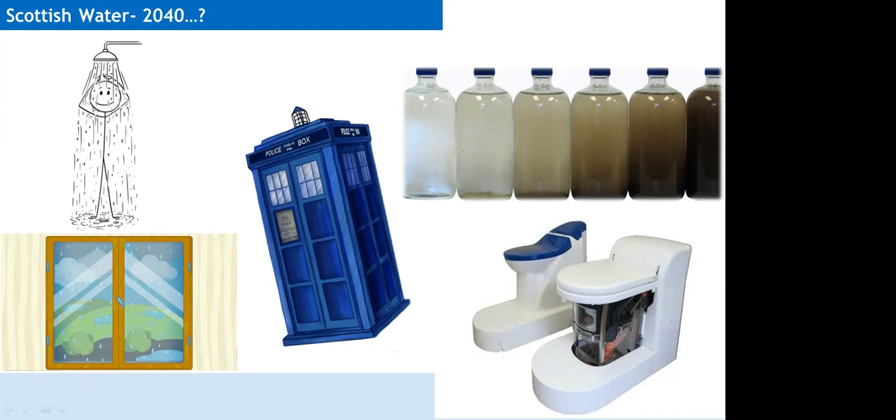So keep that picture of a potential future in your heads as we go through this presentation, and let's think about the role of innovation, how we might want to innovate to get where we're going. Now, if you paid attention to the introduction at the start, you'll see I actually work in a strategy team rather than an innovation one, and an approach we often use in strategy is a simple 3-step model.

Everybody loves a 3-step model on the screen: Where are we now? Where do we want to be? And how are we going to get there? So let's start off with where we are now. And actually, we're going to go back in time and begin with a little history lesson.

Most of our large wastewater treatment works today are operated using something called the activated sludge process, developed back in 1914 by Ardern and Lockett. It could arguably be considered the biggest improvement in public health in the 1900s, and it certainly also showed dramatic improvements in our waterways.

If you're not familiar with an activated sludge process, typically what that would look like in layout form is what's on the right of the screen there. The wastewater is initially held in something called a primary tank for a few hours, where most of the particulate matter settles to the bottom, and the water comes out the top and passes into aeration basins.

There it's mixed with a biomass or an activated sludge, bacteria that degrade the remaining organic matter. The mixture is then settled again in a final tank, which separates the wastewater from the biomass. The clean water passes out into the environment, and the sludge is collected and taken away for further treatment. And over 100 years on, we're actually still largely using the same process.

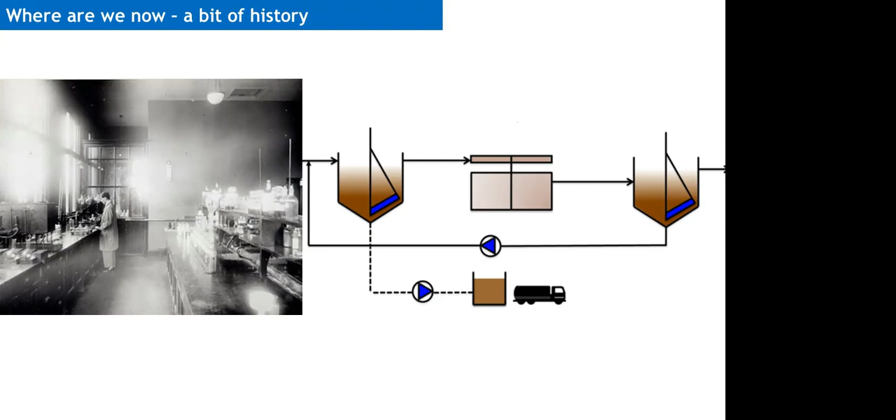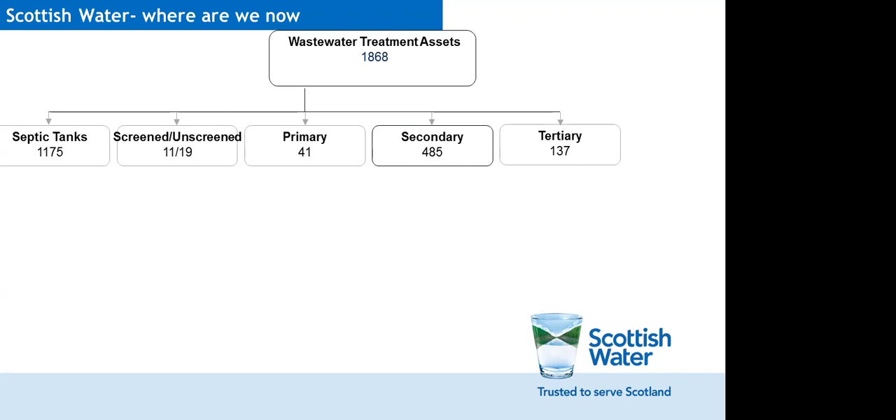So if we break down our asset base for wastewater at Scottish Water, we have a little over 1,800 wastewater treatment assets, split across all kinds of populations. At the small end, we have the septic tank, and in number that's actually the greatest number. Then we move up through primary, secondary, and tertiary treatments.

If we look at the breakdown again, we've got a large number of trickling filters, and about 10% of our overall treatment asset base is activated sludge. So if that's only 10%, why am I making a big deal out of it? Well, activated sludge makes up the largest part of our population-based treatment.

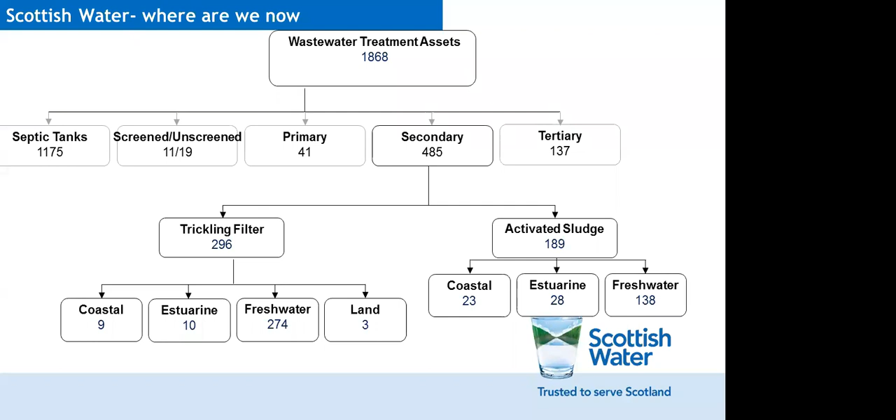So if I move on to the next slide, this is a breakdown of every single treatment works in Scotland, all 1,868 of them by population size. Right up at the biggest was Shieldhall in the top left corner, and actually all of these ones you can see, a large number of those across the top, these are all activated sludge treatment works. It's not until you get right into the tiny squares in the bottom right corner that we're looking at trickling filters and septic tanks.

So by population, the activated sludge process makes up the largest part of our wastewater treatment systems. And one of the things we need to think about is whether it's time to revise that view.

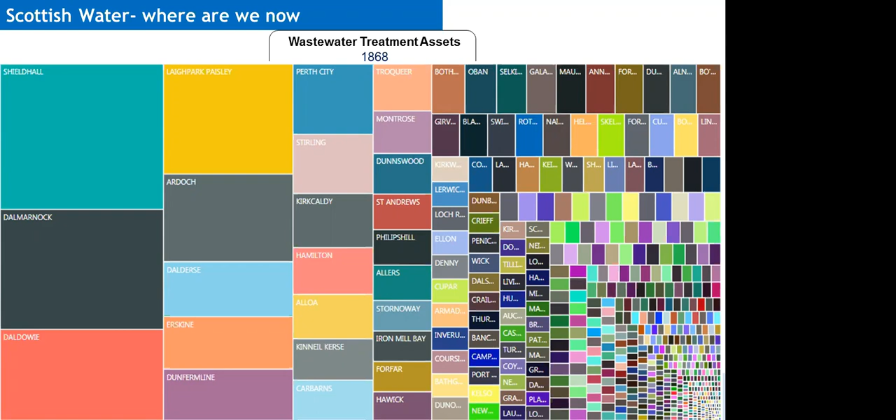Now, for anyone who's based in Glasgow, and we were originally supposed to have this talk in Glasgow, let's bring this a little bit closer to home. One of the largest treatment works in Glasgow, in Dalmarnock, was constructed in 1894 originally, for all the fact fans out there. But this sewage works was upgraded in 1965, that's 55 years ago.

This slide's got some extracts on it from a fascinating paper I found, if you find this kind of stuff fascinating like I do. This was presented to the Institution of Municipal Engineers, which was an early precursor of the Institution of Civil Engineers today. This showed all the engineering requirements that were needed to convert Dalmarnock into this modern activated sludge works.

While this site has been further modernised since 1965, indeed it's seen the introduction of ammonia and phosphorus removal processes to meet tighter quality standards, the site itself still largely runs on this activated sludge process. And if you walk around the site, the layout really hasn't changed very much from this proposed layout drawing over 55 years ago. And there's a good reason for that.

The activated sludge process is effective, it's reliable at removing the majority of organic pollutants in the wastewater. So why innovate? What might we want to change? Well, while the activated sludge process is very effective at removing pollutants, it does have its faults.

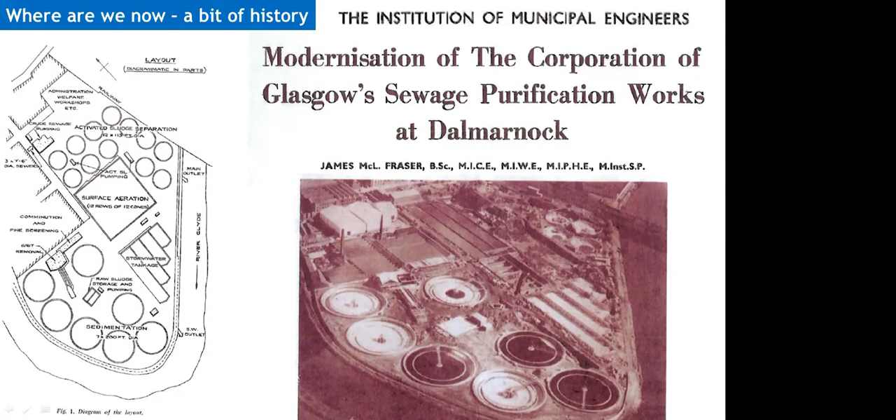So thinking forward to where we might want to be in the future. In Scotland, Scottish Water, we've recently published our strategic framework, and that sets out these 3 key ambitions for the future: delivering service excellence, moving beyond net zero emissions, and providing great value and financial sustainability. Now, each of these ambitions will overlap with each other, but there's also tensions between them within delivery. And without innovation, we won't be able to achieve them all.

And underpinning these ambitions, there's a whole set of strategic objectives that will help us achieve the 3 ambitions. Now, I'm going to zoom in on just 3 of those that will be critical to transforming our wastewater service into SR21 and beyond. So firstly, enhancing the natural environment. We know that standard wastewater treatment has delivered huge improvement in our waterways over the last 100 years.

But if we also want to look at improving our performance for things like those priority chemicals, and also look to improve the land and air environment as well, we'll need to think different. Similarly, we know the wastewater treatment process is currently a consumer of resource. It requires the use of electricity and chemical. And yet there is also resource contained within wastewater. So how might we go about harnessing this instead to fully embrace the circular economy?

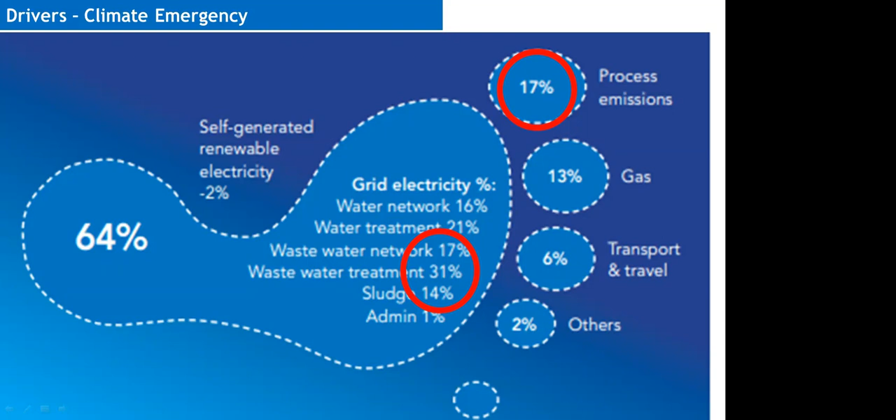Thinking a little more in the current frame of what we might need to do and what our drivers are for innovation is that of population growth. Across Scotland, our population is due to increase by about 5% in the next 25 years.

That's not a massive amount of population growth, but the countrywide figure masks some huge shifts in terms of regional shift of population within the country. We're seeing huge numbers moving from the west of the country towards the east. Within Edinburgh, the Lothians and Aberdeenshire, we might expect to see growth in the region of 20% in the next 25 years.

We need to be sure that these growing communities receive effective sewerage services, but we also need to be able to do this without placing huge investment demand on our existing customers to build new assets. Achieving this will be a challenge.

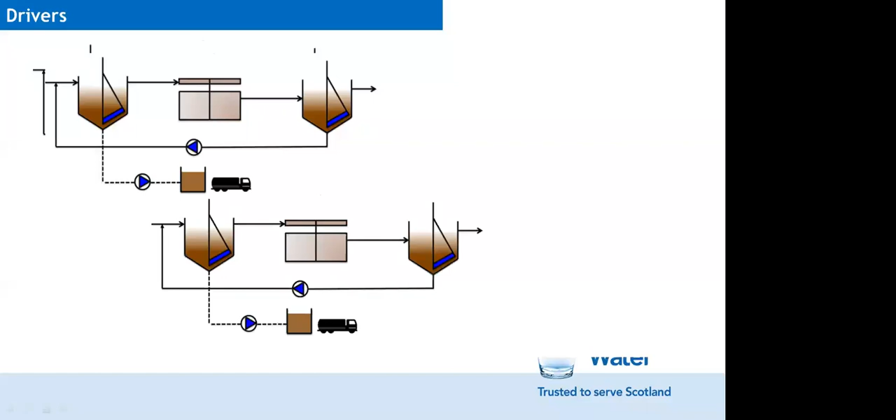Historically, when we were looking to address growth, if we'd had something like the activated sludge process, what we would do to address growth in a community might be just to create a parallel works, or even another one, doubling or tripling capacity. We know that this does work, but it's also costly, both from an operational and a capital perspective, and land isn't always available.

So some of our more immediate innovation projects have been looking at process intensification - how we can do more with the assets that we've currently got. This will help us address growing populations with reduced need for investment and reduced carbon emission in construction.

There are a number of options out there for intensifying the wastewater treatment process that all look at different aspects of innovation, and these are just a few on the board that we've looked at in Scottish Water. I'll take a couple of moments to look at a few of the trials we've done in a little more detail.

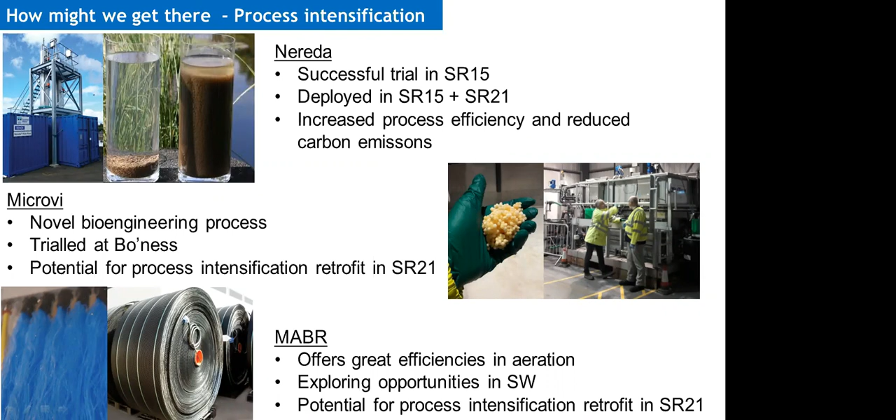First, let's look at the Nereda process. This is quite an exciting one because it's one we've seen all the way from development stage up to a full-scale installation. This is based on a traditional biomass type process. However, in this instance, through some clever bioengineering, all that bacteria is pulled together into a granule. What that means is you've got a much higher concentration of biomass treating your wastewater, so you can treat more wastewater with a smaller asset to a higher standard.

Now, because the process operates in a similar manner to something called a sequencing batch reactor, there's huge potential out there to retrofit this technology into wastewater treatment works that currently use that SBR type method. That allows a significant increase in population that can be served without the need to construct any new assets. Scottish Water first came across this technology and it was introduced to us maybe 7 or so years ago.

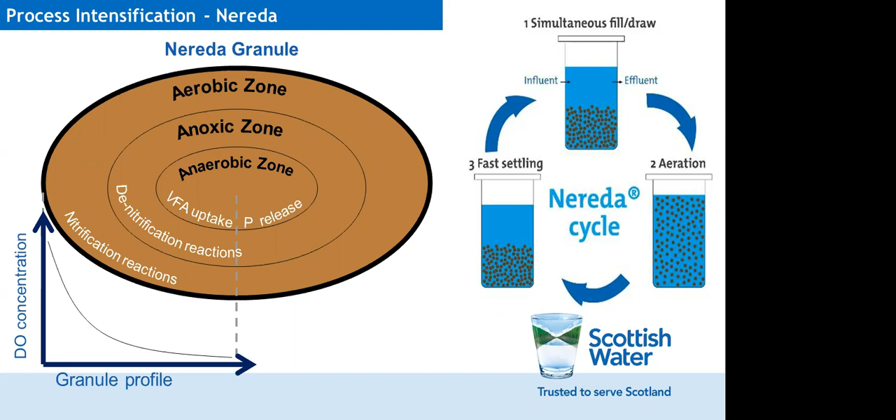And off the back of that, and some promising work that came out of the Netherlands, we ran a couple of pilot reactors, one of which was sited at Dalmarnock, the treatment works I mentioned earlier. That's a picture of the pilot we ran on an unusually sunny day over in Glasgow.

What you can see was really a very successful trial. For the most part, the total phosphorus, TP, was well below an average of 1 milligram per litre, which was what we were looking for. Ammonia results, again, pretty much every result came in below 1 milligram per litre, which was really fantastic. Similarly, the BOD, the organic content of the wastewater, was well within our performance expectations, as was suspended solids.

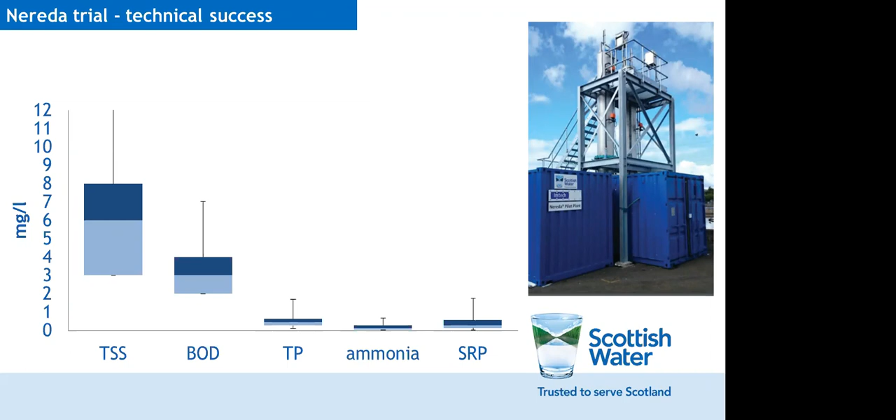Off the back of what was quite a successful trial, we put forward a full-scale project. Next slide, yep, a photograph of our Nereda installation at Inverurie. This is a small satellite town in Aberdeenshire that was both due to be upgraded with a significant capital maintenance project and also experiencing quite a bit of growth in the catchment. So here we are in the final stages of construction for that site, and we're now at the end of commissioning. Quite exciting to see a process go from very early stages through innovation trials through to a full-scale installation.

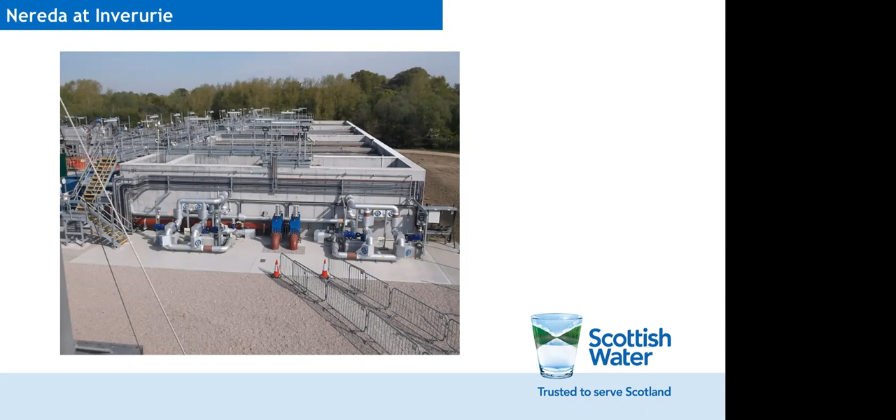Now, the other pilot trial I wanted to briefly mention, at a slightly earlier stage in development, is the Microvi technology. This is another really exciting, really innovative piece of technology we've been trialing down at our site in Bo'ness.

To try and summarize how it works, you've got the little granules or biocatalyst, which is what the hand's holding in the left photo. I always think it looks like Rice Krispies, but it's actually little kind of beads, and they've got specific selected bacteria growing inside of them. It's really cool because you can select the bacteria that best degrades the wastewater, that are most effective at treating what you're after treating.

Which is not what you typically get in activated sludge. You typically get the fastest growing bacteria that outcompetes everything else. With this, because the bacteria are embedded within the catalyst, you can select the most effective treatment, even if they're not the fastest growing biomass. The picture on the right is the pilot unit we had down at Bo'ness.

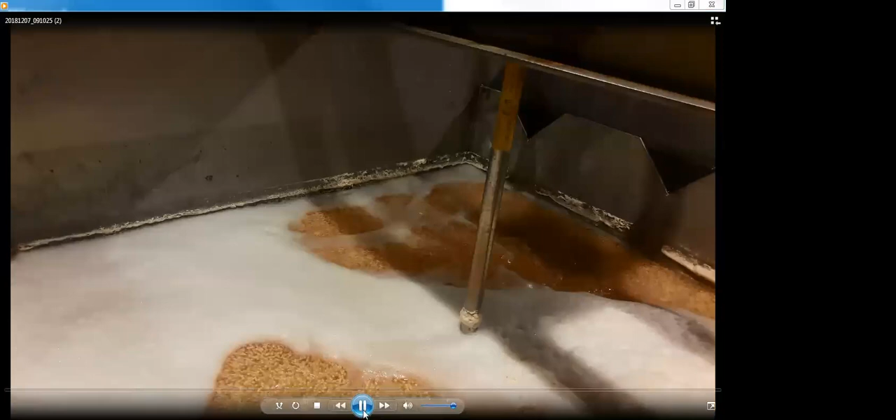I'm going to see if I can show a little video of that in operation. That's what it looked like when it was up and running.

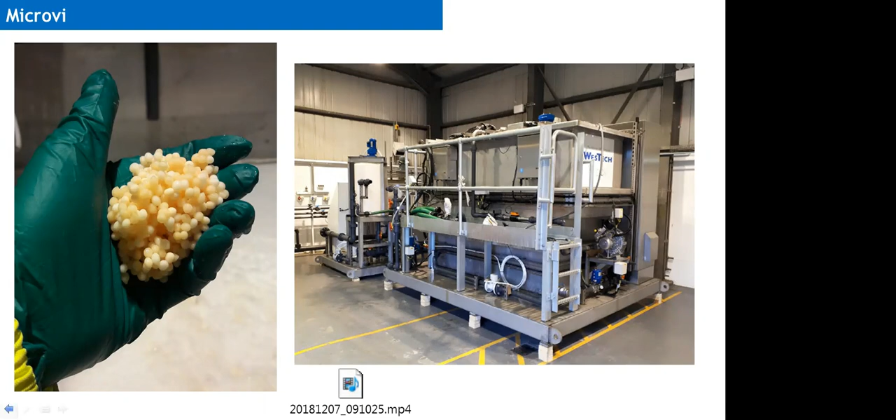We then had a short period of what I've called normal operation, so just taking a standard influent in, running it through the treatment process and sampling the effluent, particularly the ammonia and the soluble BOD, soluble organics in the wastewater. You can see that the effluent performance was really pretty good.

Happy with that, we moved into phase 3, which I call testing the limits. That's kind of pushing the technology as hard as we can. So how can we, if we increase the throughput or decrease the aeration, what if we mimic storm events, all that kind of stuff, so how well does the technology cope if you're putting it outside its typical bound of operation. Really quite happy with how that's performed, so hoping that will move through to the next phase trials and investigate options for full-scale treatment.

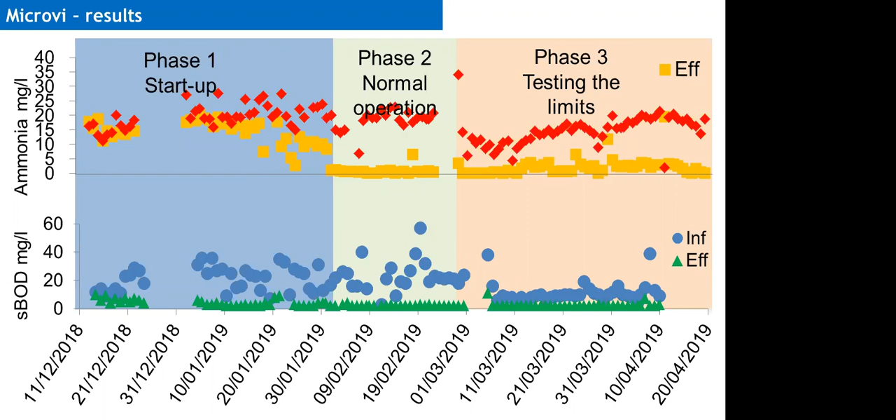The other aspect of Microvi that's been really, really interesting is looking at suspended solid production. One of the big claims of the technology is that they don't produce a biomass or any excess biomass because all the bacteria are embedded within the catalyst. We wouldn't have any secondary surplus sludge that we'd need to collect and then take off site and treat. You can see the results there in terms of the suspended solids.

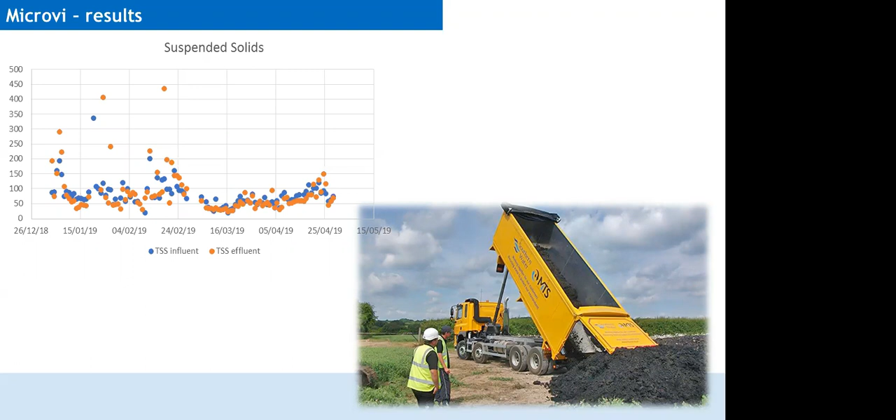Actually, for the large part, what was coming in equals what was coming out, so we weren't generating any excess biomass. It also meant that maybe we weren't degrading any of the suspended solids coming in either, so there's pros and cons to that result. But on the whole, we could pretty much confirm that we weren't generating any excess biomass.

Now, I couldn't talk about our Microvi trial at Bo'ness without doing a little plug for the Innovation Test Centre down there. The Bo'ness Test Centre is a live wastewater treatment centre with a dedicated test centre attached.

And these facilities, and there's a complementary one out there for clean water up in Gorthleck as well, are run as part of our commercial arm, and therefore they're available to anyone who wants to test the technology there. So it doesn't have to be Scottish Water trialling the technology, although we certainly do trial a number of things down there.

So if that's some of our more immediate innovation, how are we thinking more about the long term? Going back to our strategic framework and what we might need to do to achieve our three strategic ambitions, our innovation team have been developing a series of route maps and challenges for innovating, which are designed to align with our strategic framework and help set the direction for innovation.

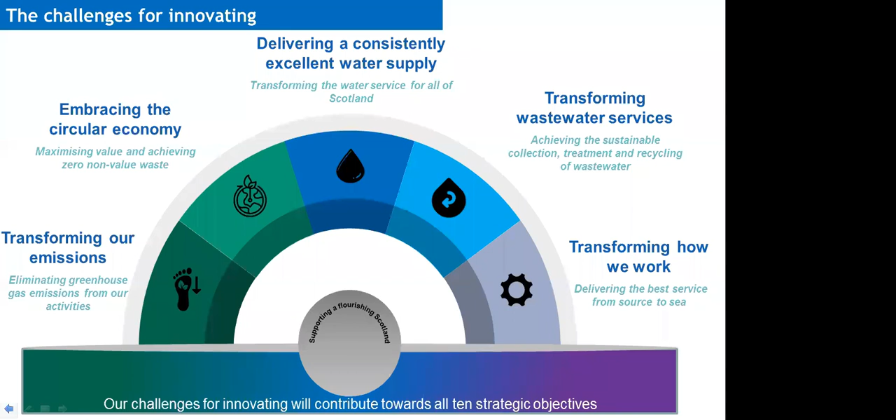So by going out there and setting our challenges for innovating, we're hoping that the industry and the supply chain will help us take up this challenge and come up with new ideas. From the back of that, we're hoping to develop four demonstrator projects, and the idea of these is to prove at-scale versions of these step change innovations that we're after.

Now, the projects shown here cover all aspects of our strategic ambitions, but the one I particularly want to focus on in the final part of this presentation is talking about energy and resource factories. So if we're to move into this world where we've transformed our emissions and enhanced our natural environment and fully embraced the circular economy, then we're going to need to rethink our attitude to wastewater, moving away from thinking about wastewater treatment works and towards thinking about sewage as a potential source of resource and energy for the future.

We know, for example, that wastewater contains far more potential energy than is currently used to treat it. And if you remember the emissions footprint slide from the beginning, quite a large portion of that energy that we're currently using to treat, we ought to be extracting, we ought to be trying to harness that from our wastewater itself rather than bring it in.

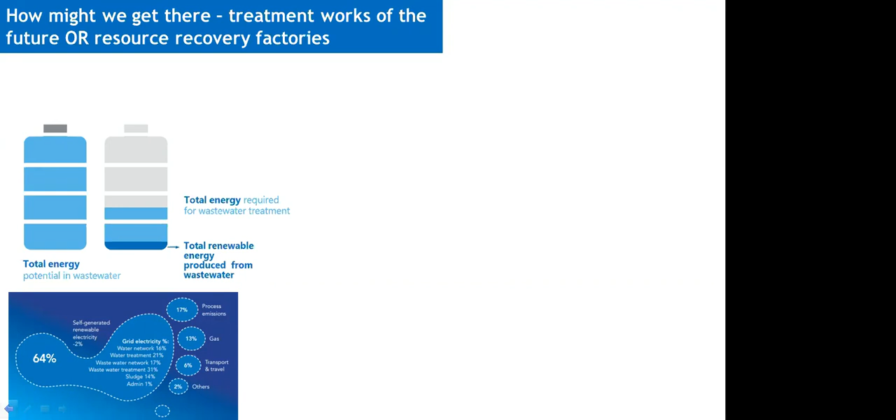Now, this flow sheet that I've put up is a little bit old now. It stems from some work we did with Cranfield University a few years back, but I think it's still very relevant today. This is looking at what potential options might be out there for wastewater treatment works for the future, what might that look like. I just want to focus in on a couple of aspects of this flow sheet that I think are really exciting, and the kind of technologies and things we might be looking for innovations in, in the not so distant future.

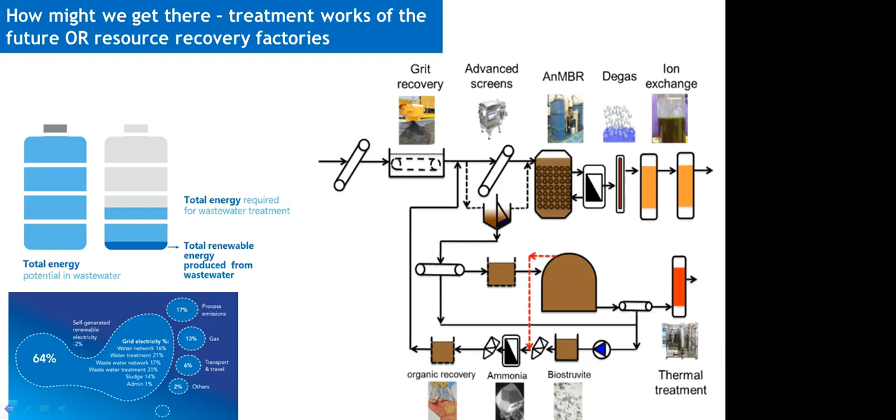So starting off, the main treatment in this particular flowchart, and there are a few, was using an anaerobic membrane reactor. So the key bit there is the anaerobic part of the reactor.

We know that at the moment we blow oxygen, spending all this energy to try and treat our wastewater. But actually, if we're able to do that anaerobically, without blowing air into it, not only do we avoid that energy requirement, but we can also generate methane, which we're able to harvest and use as a potential bioresource.

Now, I mentioned earlier about process emissions, and methane is one of those. So we need to be careful that if we're deliberately generating methane, we're capturing and using it, not letting it emit to the atmosphere. Another big advantage of anaerobic technology is that it doesn't produce nearly as much sludge as an aerobic one, so less excess waste to tanker around.

Now, the next part of this flow sheet is quite different to the way we treat wastewater today. One of the side benefits of anaerobic treatment is that it only deals with the organic fraction, so it doesn't remove nutrients like ammonia and phosphorus. This gives us a great opportunity to directly recover these resources and potentially use them - ammonia and phosphorus, both key aspects in fertilizer. So one of the treatments we've looked at is an ion exchange method.

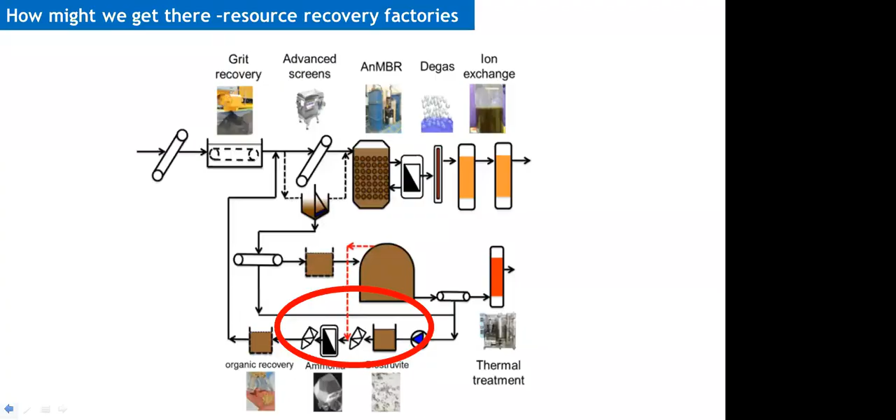And then finally, we'll still produce some sludge, some bioresource from the primary stage of treatment. We need to understand how we can best generate energy from this, as well as looking at potentially useful byproducts like struvite, ammonia, or perhaps even higher value organic chemicals. There are so many potential resources in our wastewater out there to harvest. So that's just one of the potential routes for that demonstrator energy and resource recovery factory.

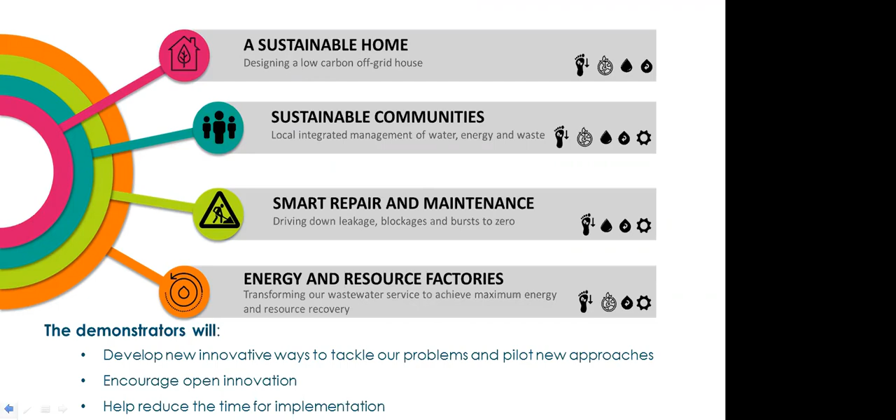I really think this is something we need to focus on for innovation to help us move into the future and achieve those strategic objectives. I'll finish with one final thought. I've rambled on a lot about wastewater treatment technology, how the activated sludge process has had its day, and all the alternative options out there we might want to employ in the future.